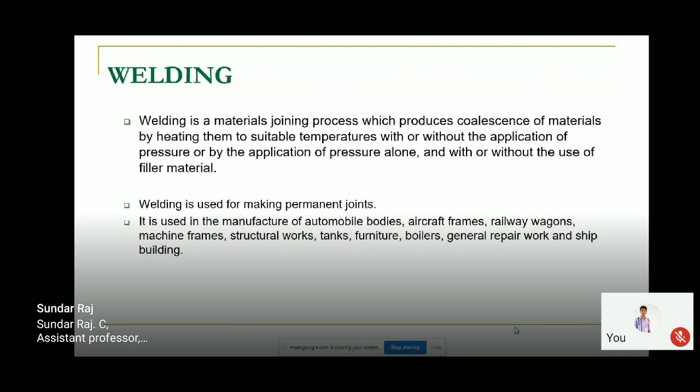Nowadays there is another welding process called friction stir welding and friction welding. This comes under the category of applying pressure alone, which is called the solid state welding process.

Here we are not going to melt the material. We are going to apply pressure alone, and we are going to bring the material temperature up to 60 to 80% of the base metal melting temperature. By the pressure, we are making the joints. That is called the solid state welding process.

At the beginning, Dr. Kanaran sir told that welding is one of the basic manufacturing processes - yes, it is absolutely correct. Application of welding is very wide, even from your household appliances to aerospace components. Without welding, you cannot see even any component.

If you see any vessels in your kitchen, definitely it will be joined by a welding process. If something is going to space - rocket motor casing, satellites, whatever goes into space applications - it is completely fabricated by the welding process. So without welding, nothing is there in manufacturing. Even a small component, in a fan, a table, whatever it may be, definitely welding will be there.

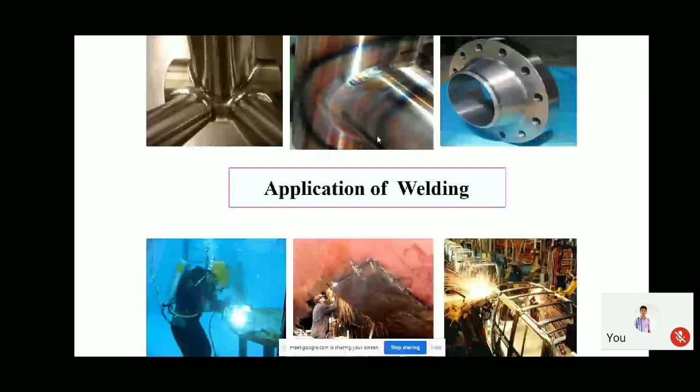Now, in the gas welding process, we can call it as - sir, please. Oh yes sir, sir okay. Okay, no problem, you continue.

In the gas welding process, the oxyacetylene welding technique, as we know well, is called gas welding or oxyacetylene welding. We are using oxygen as well as acetylene combined together, and we are getting the fumes. Through that, we are making the weld joints.

Electrical arc welding comes under SMAW, GTAW, plasma arc welding, GMAW, SAW. The main industry applications come under GMAW, GTAW, and plasma arc welding, widely used because here we use electric current as the power source to melt and join the material.

This is the high density welding process. Generally there are two types: one is laser beam and another is electron beam welding. The power source from this high density welding is very high as compared to the electrical arc welding process.

So basically what is happening, sir? The metal is in solid form. We are melting the metal to the liquid form, and then it starts to solidify, and we are getting the joints.

The other type is the solid interface. Here we are not going to melt the material, but we are making the joints without melting. As I told you previously, there are two different types of welding processes in this: one is friction stir welding technique, and the other is the friction welding technique.

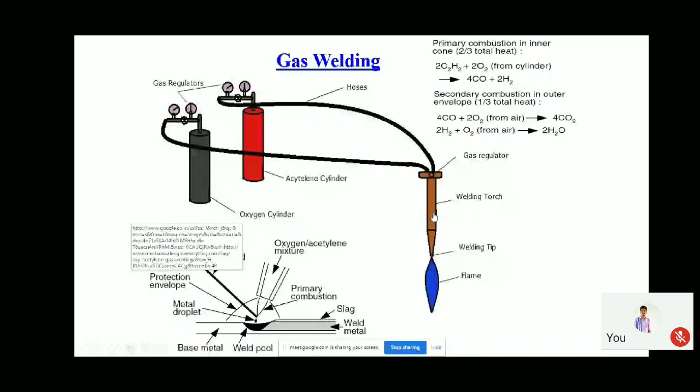When these two gases combine together in the torch, we are getting the fumes. Based on the percentage ratio of the fumes, it will be considered into three different categories: neutral flame, oxidizing flame, and reducing flame. Here you can see there is an inner cone and an outer cone, so the mixing ratio of the two gases gives you the different flames.

The next one is the most important and widely used welding technique globally. That is called the gas tungsten arc welding process, also called TIG welding. So basically, how does this function, sir?

Here is the schematic layout and this is the real-time photograph of the weld plate. The welder makes a groove of the joint. He has the filler material in one hand and the torch in the other. When the fuse comes out, when this tungsten electrode touches the base material, the arc starts to initiate by melting the filler material, and the weld joint takes place. I can show you a small video.

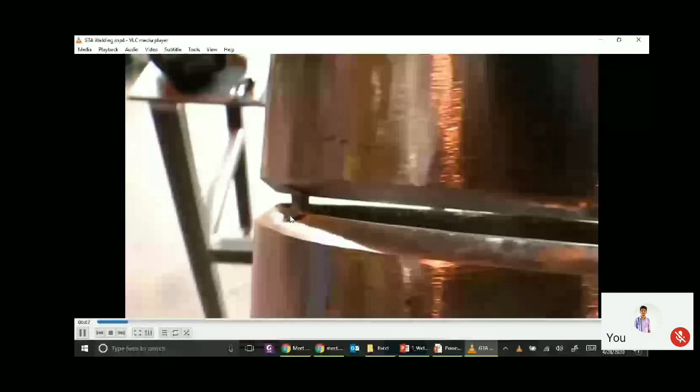So now you can see here, this is a pipe joint. The tack welding is already done, and the groove has been taken. This is the electrode, the tungsten electrode, and the filler wire is here. The arc comes when the tungsten electrode touches the base plate or material you want to melt. By feeding the filler wire externally, the deposition takes place. So this is the concept of the TIG welding process.

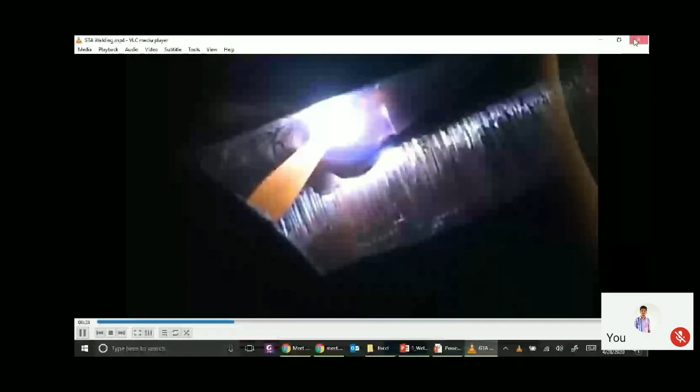So you can see the weld bead over here. With low deposition rate and slow speed welding, you get a clean weld. The deposition rate is very less in TIG welding because you have to coordinate both your hands, one hand on the torch and the other hand on the filler material. So coordination is very important. That's why the TIG process is always slower compared to the MIG welding process.

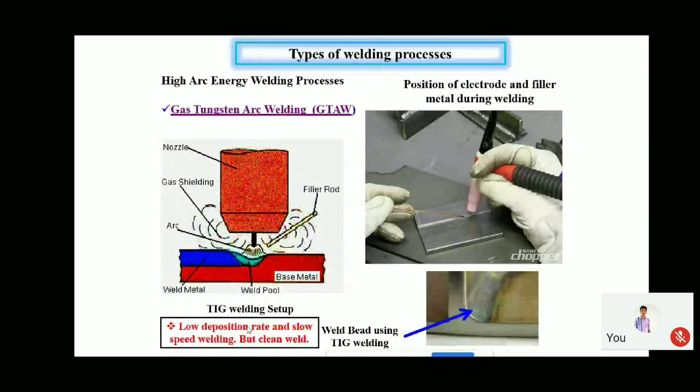So why are there different types of polarity? Why can't we just do it for a single one? I will tell you. In general, when welding any steel or nickel-based superalloy, we go for DCEN. When going for DCEN, the electrode is connected to the negative side and the workpiece is connected to the positive side. When the current is maximum at the workpiece, we get the maximum depth of penetration.

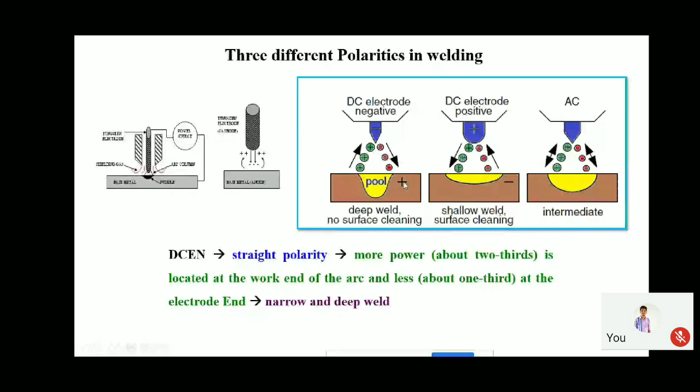Then why do we need this kind of polarity? When you are welding aluminum alloy or magnesium alloy, an oxide layer forms during the weld process, aluminum oxide (Al2O3), on the top layer of the weld. It's not possible to clean it during the welding itself. So when connected this way, more current is on the positive side and less on the negative side, and the atoms get bombarded so that the oxide layer is completely removed. So when welding aluminum alloy, we generally use DC electrode positive, or for magnesium alloy as well. This is the concept of what happens when welding aluminum alloy.

In the TIG welding process, there is another process called pulsed current gas tungsten arc welding. In general, what is this process? The machine should be the same, you use the same welding machine, but there is another option called the pulse parameter, where you vary the current from a lower level to a higher level. For example, in continuous current GTAW, the welding takes place continuously like this, with no change of current. If you fix the current at 180, the entire weld will be done at 180 amps.

Sir, your audio is breaking up. Kindly have the mic near. Audio is breaking up, sir.

Audio not clear, sir. Is it clear now? Yes, sir. Hello. Yes, sir. It is clear, sir.

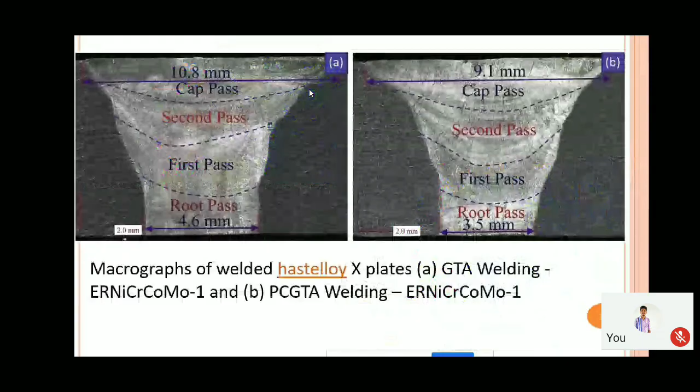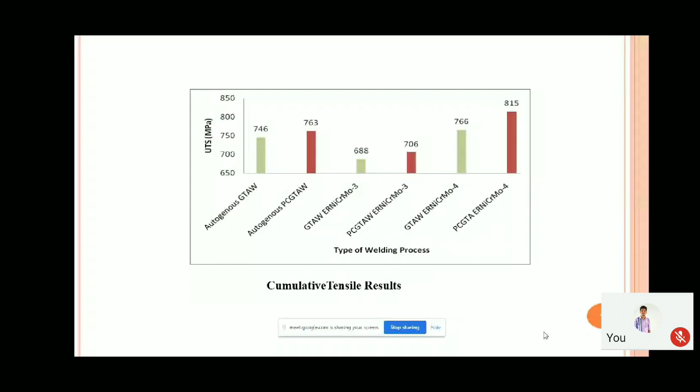So what are the advantages and disadvantages, sir? It is not suitable for joining thick sections. GTA welding is suitable for joining thin sections due to the limited heat input. The deposition rate is low, as I told previously, compared to MIG welding. So you can weld metal without filler material. Autogenous welding is possible, up to 3 mm thickness, not more than that in the autogenous case. Excessive welding current causes melting of the tungsten electrode and results in brittle tungsten in the weld pool.

So you can see this welding process can be used for welding reactive materials, even titanium and zirconium is possible, and multi-pass is possible with low welding speed. This is the disadvantage. And these are some of my own reference papers which I worked on closely with GTA and PCGTA with different grades of superalloys.

And another process is called the ATIG welding process. So what is the ATIG welding process, sir? It is again a conventional TIG welding process. So if you are applying any salt, for example Fe2O3, SiO2, TiO2, which is available in our chemistry lab or any laboratory.

So you can mix the salt with methanol, ethanol, or acetone. You just apply it over the weld area. And after you apply it, you do the welding process, your entire property gets changed. So what is happening, sir, actually? For example, when we are doing the conventional TIG welding process, your molten pool will flow away like this.

But when you are applying a salt, like SiO2 or TiO2, the flow of liquid will go toward this direction. So what is this effect called exactly? It's called the Marangoni effect. So what is happening is it converts the negative surface tension to positive surface tension of the weldment, so that the weld will achieve deeper penetration as compared to the conventional welding process. So in this case, even with lower current, you can achieve the maximum depth of penetration. That is possible with the ATIG welding process.

As I told you, in the autogenous case, we can do welding of only 3 mm thickness. But when you apply any salt like SiO2 or TiO2, you can go up to even 8 or 9 mm without adding filler material in the TIG welding process.

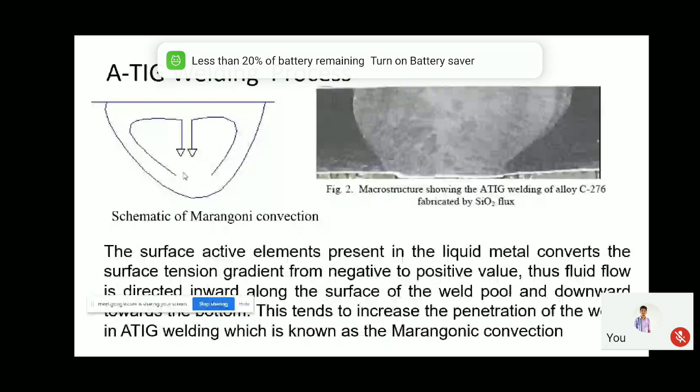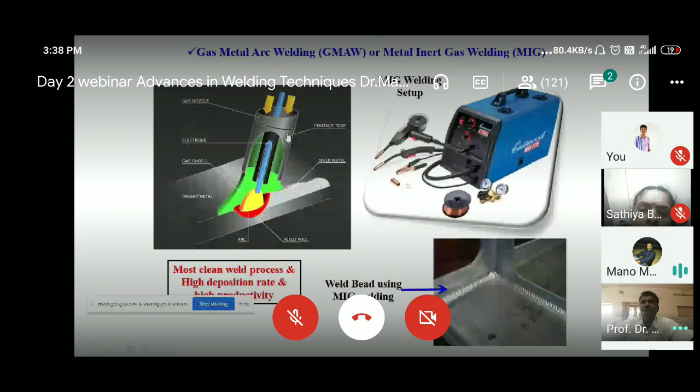You can see here the shielding gas, the electrode, and the filler material, everything is coming inside the nozzle itself. In this nozzle itself, you are getting filler directly. Whereas in the case of TIG welding, you are feeding the filler material externally and doing the welding, so the time taken will be more in the TIG welding process. Whereas in MIG welding, since the filler wire is directly coming inside the torch in the nozzle itself, the speed will be very high.

Sir, your PPT is not showing.

It is very difficult to weld high strength aluminum alloys, particularly 2 series as well as 7 series, in this welding process. These two aluminum alloys are widely used in the aerospace industry because of their high strength compared to other aluminum alloys. In order to weld this kind of material, the industry Fronius developed a welding machine called the CMT process, the cold metal transfer process.

The CMT process works similar to welding in a short circuit mode. When the electrode touches the metal, automatically the wire retracts back. Immediately switching off the current, the wire retracts back to the nozzle so that the weld pool detaches and comes off as fine droplets. When it forms very fine droplets, the heat input is comparatively less, so the possibility of forming a crack and other defects is reduced in the CMT welding process.

When reaching the base metal, the short circuit happens. When the short circuit happens, the wire retracts back. When it is retracted back, the molten metal falls down onto the base plate, so that the welding process takes place.

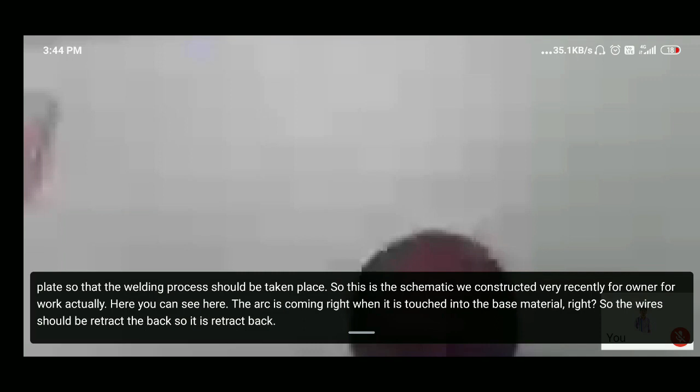This is a schematic layout we constructed very recently for one of our works. Here you can see the arc is coming, and when it touches the base material, the wire retracts back. As it goes up, the molten pool forms as the electrode melts, and it falls down. Similarly, the cycle keeps repeating. This is the working principle of the CMT process.

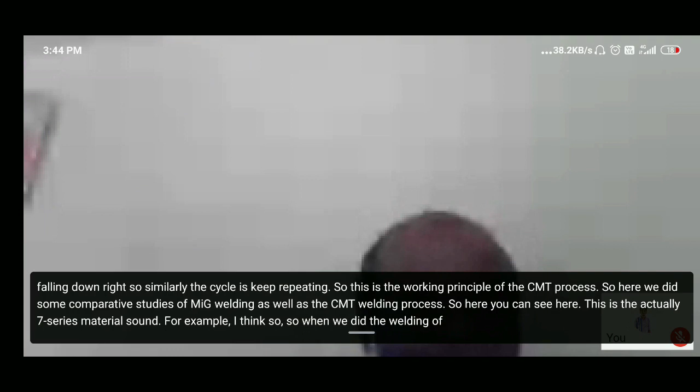Here we did some comparative studies of MIG welding versus the CMT welding process. This is a 7 series material, 7475 alloy I think, welded with two different filler materials, 4043 and 5356. When I did the welding with the 5 series filler material, I could not find any kind of defect, whereas in case of 4043, more porosities were present. So the selection of filler material is one of the most important factors in the welding process.

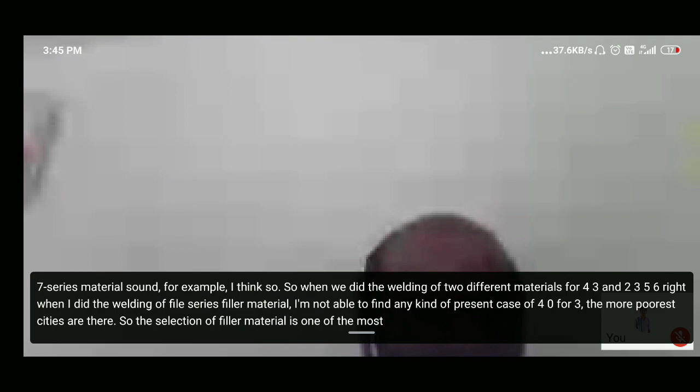Also, in the pulse mode, the bead width is very less, whereas in normal CMT, the width is very high. In GMAW, again, the width is very high. When I go for the pulse mode, because of the controlled current environment, I get a much lower bead width.

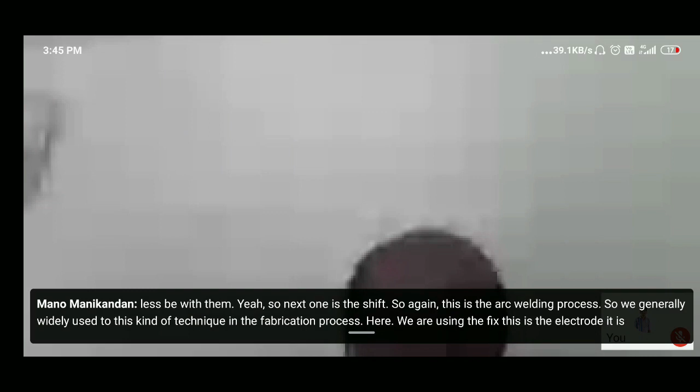The next one is the shielded metal arc welding process, which you know very well as the stick arc welding process. We generally widely use this kind of technique in fabrication. Here we use a flux-coated electrode. This coating gives protection during the welding process and also acts as a shielding agent.

The electrode will always be classified with some numbers. For example, E7018. E indicates the electrode. The first two digits, 70, indicate the ultimate tensile strength - here 70,000 psi. The 1 indicates the position of welding, and the next character indicates low hydrogen. So if you see any electrode, there will definitely be some number representing the strength, the position, and the hydrogen indication, all represented together.

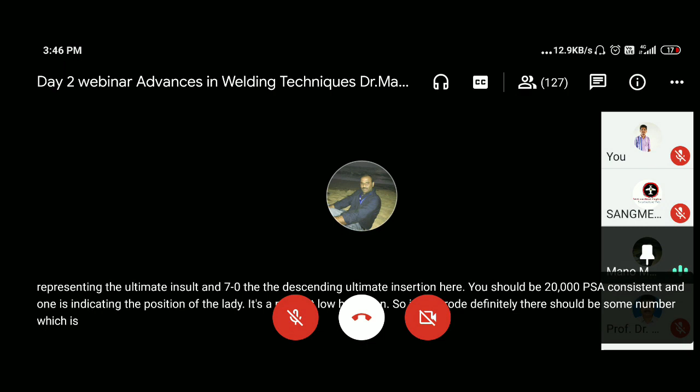Next is the submerged arc welding process. Why do we go for submerged arc welding? If you want to weld a very high thickness plate, we use the submerged arc welding process.

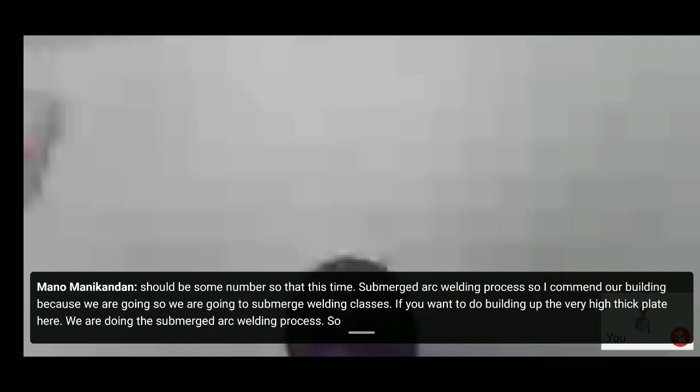You put granular flux - this white color showing here is the granular flux, and the torch is here. The torch should be submerged inside this flux, so during welding you cannot see the flame outside. Generally in industry, if you want to weld very high thickness plates, they go for the submerged arc welding process.

Next is laser beam welding as well as electron beam welding. As I told you previously, these two techniques are high density welding processes. The current coming through, the electrons coming out, bombard the material and melt it. Industry uses this process for complex kinds of things - they go for laser beam welding as well as electron beam welding process.

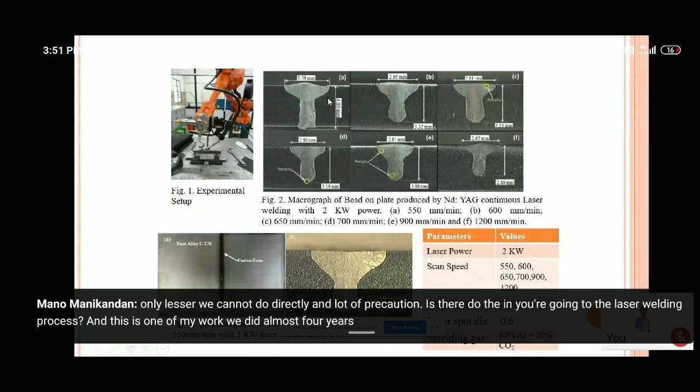This is one of my works from almost 4 years before. We tried welding a 3 or 4mm thick plate of Hastelloy C276. We did a lot of trials first to optimize the process parameters, and finally we achieved full penetration at a thickness of 4.8mm.

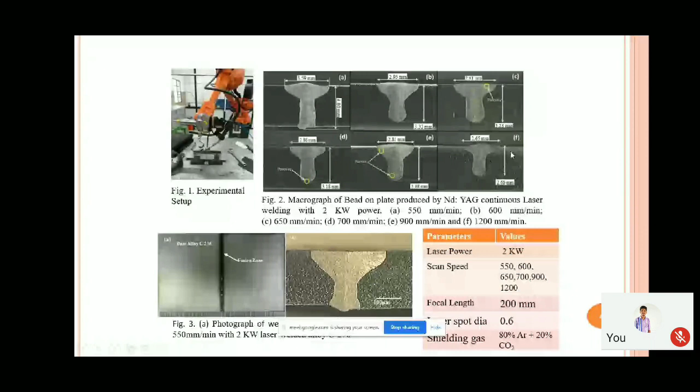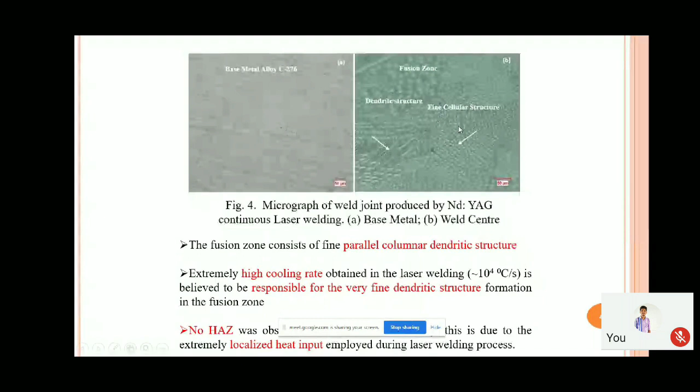We compared the study of laser welding with the TIG welding process on the same material. We observed that the microstructures are very fine, which leads to higher tensile properties as well as higher micro hardness compared to the TIG welding process. I got tensile properties almost the same as the base metal property. It's really very interesting, and I got a very good result compared to the TIG welding process.

You can find this publication - this is my reference, my published article on the laser welding process.

I got the tensile strength almost the same as the base metal. My base metal strength is 750, and in fact I got higher than that - an average of 761. So compared to the TIG welding process, laser welding gives an excellent result, achieving strength equal to the base metal.

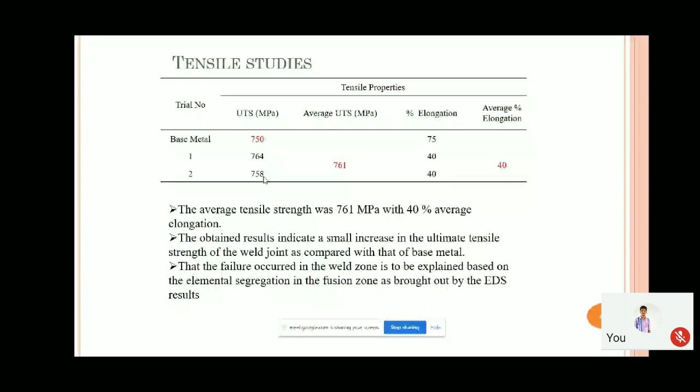Next is the laser hybrid welding process. Laser hybrid welding is a new development where we can do both arc welding and laser welding in parallel. You can combine a laser source with a TIG or MIG welding machine, and both will melt the material together, allowing you to achieve very fast welding with high depth of penetration in an easier way. This is called laser hybrid welding technique.

Next is the electron beam welding technique. As I told you previously, electron beam welding is widely used in aerospace industries for welding titanium alloys, because titanium cannot be welded with the TIG welding process - it requires a vacuum environment.

So in electron beam welding, the workpiece should be kept completely under a vacuum environment while we are doing the welding process. High depth of penetration is possible, owing to the keyhole welding technique. So you can join any dissimilar combination or similar combination using electron beam welding.

Whereas from the industry point of view, they widely use it for titanium alloys, because titanium is not possible to weld with the TIG welding process due to oxidation issues. You will get cracking, porosities, everything.

And this electron beam welding technique, the investment cost is very, very high. Even if you want to go for a 40 to 50 mm thick plate, you need to invest more than 8 crores for a single machine. And the maintenance cost is very high. So very rarely do people working in the aero industries have this electron beam welding facility.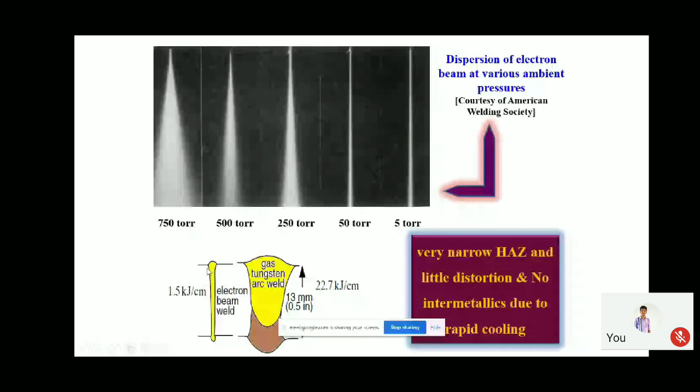Compared to even TIG as well as laser welding, the microstructures are completely refined. Very fine cellular and dendritic structures can be observed in electron beam welding. And the HAZ is completely nil, because the width of the penetration is very less, so you cannot see the HAZ also. This is one of the advantages compared to conventional TIG or MIG welding process. You can see here the microstructures are very fine.

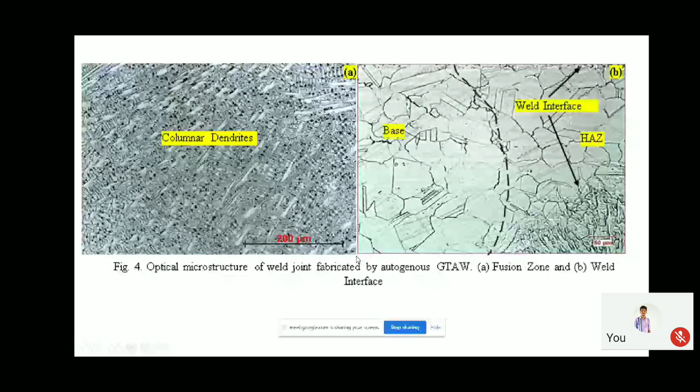Next, to the resistance welding. In general, resistance welding is widely used in automotive industries. For example, in the manufacturing of a car, a lot of resistance spot welding will be there to join two materials, using electric current. So in spot welding, they apply force on two sides, the material is placed, and the welding operation takes place. So automotive industry is the main user of the spot welding process.

Next, moving to friction stir welding, one of the emerging green welding techniques. This friction stir welding technique is widely developed for aluminum alloys. There are 8 different series of aluminum alloys, based on the addition of alloying elements. As I told you previously, 2 series and 7 series materials are not possible to weld with conventional welding processes because they are heat treatable materials. So the only possible way to weld these aluminum alloy 2 series and 7 series is the friction stir welding technique.

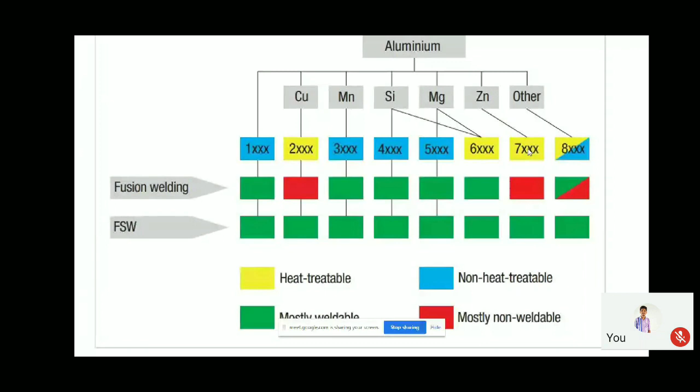So what is happening here, sir? It is similar to your milling operation. Actually, friction stir welding is similar to milling operation. I can show the video.

So here you have the two plates, and clamping is taking place. This is the tool, the welding tool. It keeps rotating, similar to a milling machine. It is coming... now it is applying pressure. By applying the pressure, the welding takes place.

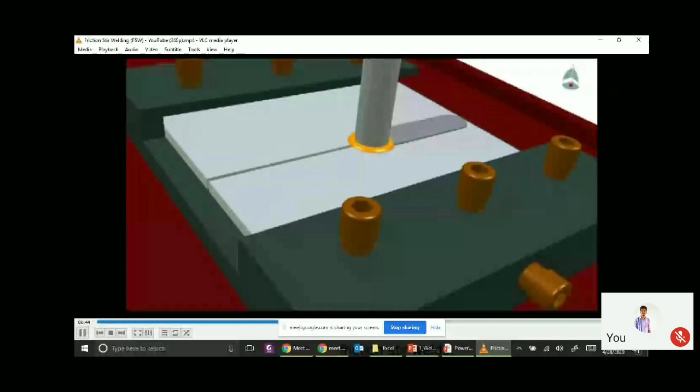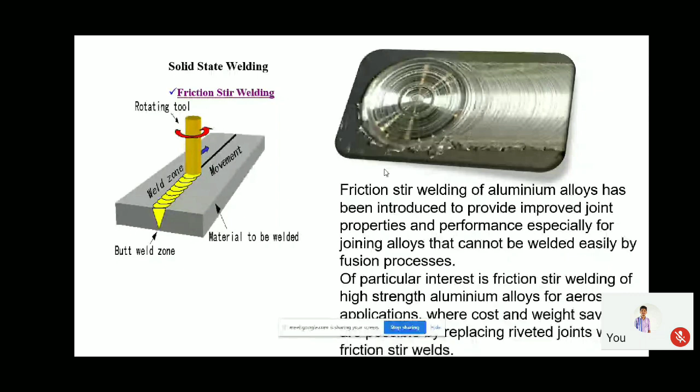As I mentioned in the very first slide, joining the plate without applying heat is called a solid state welding process. I think you saw the video now, and you will understand. Here, melting does not take place. The joining happens purely because of the pressure applied between the tool and the base material.

So we did some studies in the past on aluminum alloy 7475, and we have developed this tool.

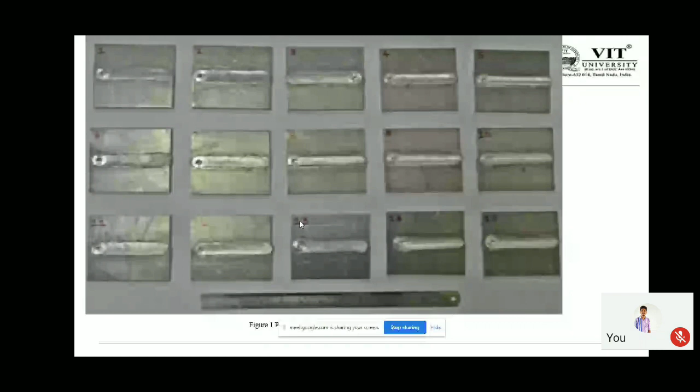Actually, we optimized the process parameters using the Box-Behnken method, and we can see the welding has happened over here.

So as I told you previously, for aerospace industries, particularly the high strength aluminum alloys are widely used for construction of the aircraft, both 2 series as well as 7 series. Mostly they are using the friction stir welding technique to join the materials.

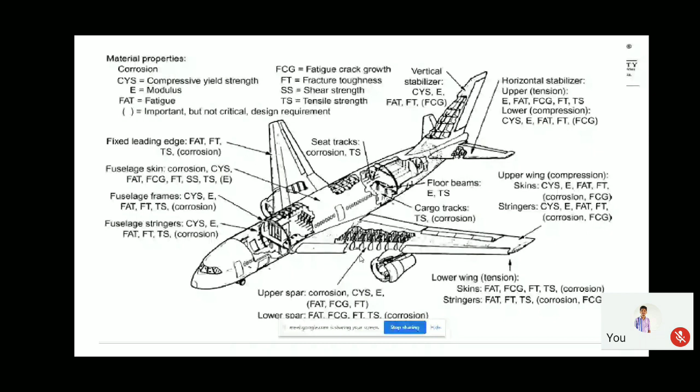And nowadays, even many new applications are coming out for metal to polymer joints. The composite is coming in a bigger way, because when you're using steel in aerospace or automobile applications, the weight keeps increasing. In order to avoid this, they are going for composite materials. Many parts of metal as well as composites need to be joined in aerospace as well as automobile industries.

So now we started working on metal to polymer welding also. There are different types of welding techniques available. One, we started trying friction stir welding to join both the metal and polymer combination.

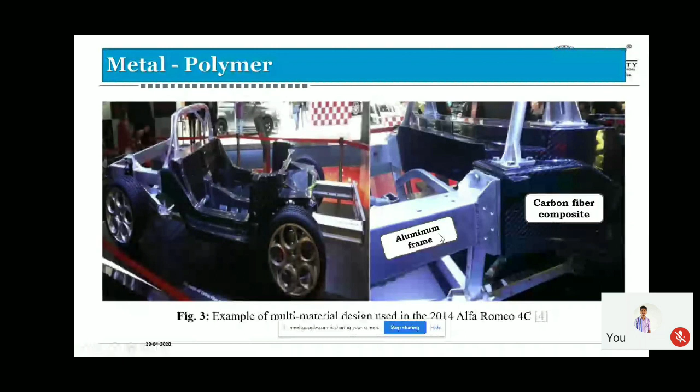So these are some of the applications you can see here: carbon fiber composite with the aluminum frame. Even for automobiles, they started using carbon fiber with aluminum alloys to make the welding. All these things are coming up in a bigger way.

So this is the construction of the aircraft. You can see here this is the upper deck and this is the lower deck. In many places now composites as well as metals are being joined, and they are doing it with riveting or bolting, but some technical issues are there because the stress concentration here is very high, so sometimes it starts making cracks.

So we are trying to do friction stir welding because most of the materials are 7 series material as well as composite materials. So we are trying to start working on metal to polymer joining using the friction stir welding process.

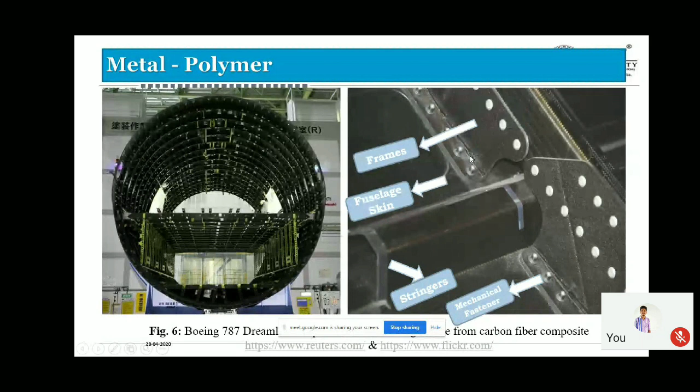If you see this slide closely, the passenger aircraft is shown here. As I told you, if you take aerospace, mostly the 2 series and 7 series materials are widely used everywhere in the upper wing, fuselage, lower wing, military and space aircraft applications, because this material has a strength of almost 650 MPa, which is equal to some grades of stainless steel.

That's why they are using aluminum alloy 2 series and 7 series in aerospace applications. So this is one of my publications related to the friction stir welding process. You can find it and look it up.

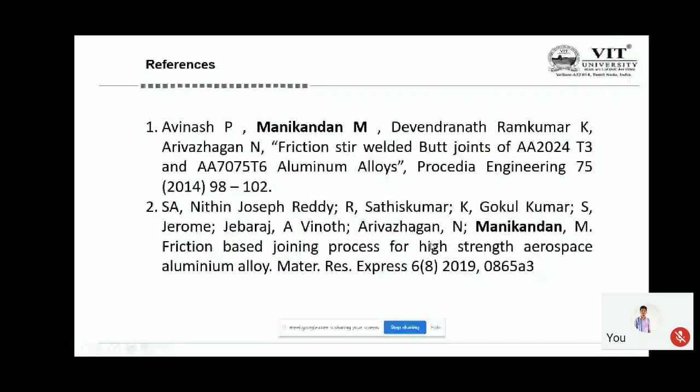So next, the solid state welding process is the friction welding process. I will show you the video. Using this, we can do the welding of pipe joints.

So now the joining is taking place over here.

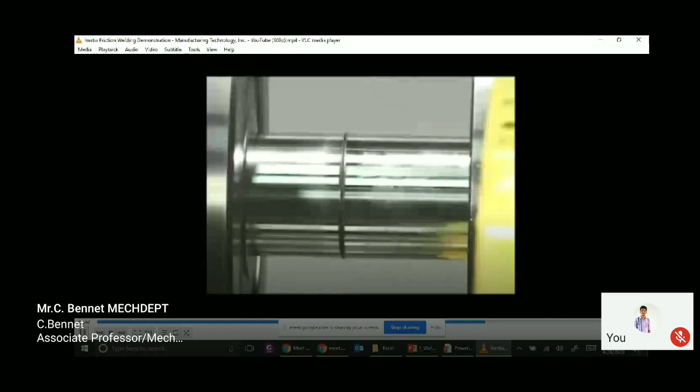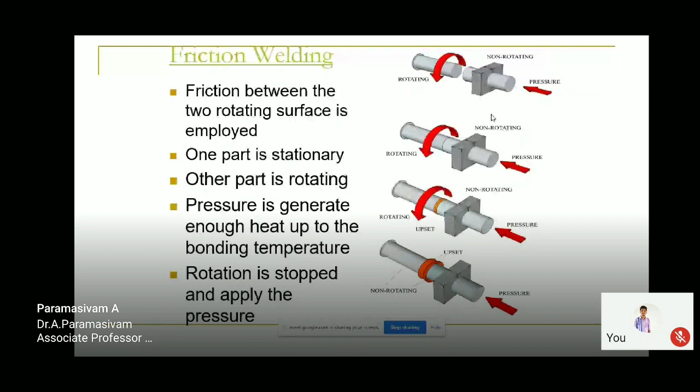So this is another solid state welding process. You are joining pipe kind of things. It is similar to our lathe machine operation. You can assume the lathe machine operation with the headstock and the tailstock. In the headstock, you keep one rotating object, and in the tailstock, you keep a stationary object. Once it reaches a certain speed, you apply pressure in the tailstock, and by applying the pressure, melting takes place and joining happens.

If you see the real-time component where friction welding is happening, you can see the turbocharger, the turbine blade as well as the shaft, both joined using the friction welding technique. Previously they did the electron beam welding technique, but since the cost is very high, nowadays they started doing the linear friction welding technique for joining turbine blades with the shaft.

So now we can see here, when you are increasing the welding current, the heat is increasing. When the heat is increasing, the melting rate is high. When the melting rate is high, the deposition rate is very high. When the deposition rate is high, the penetration keeps increasing. So this is the concept for the arc welding process.

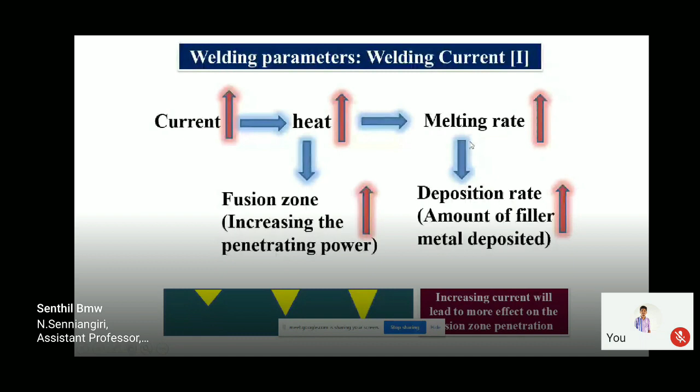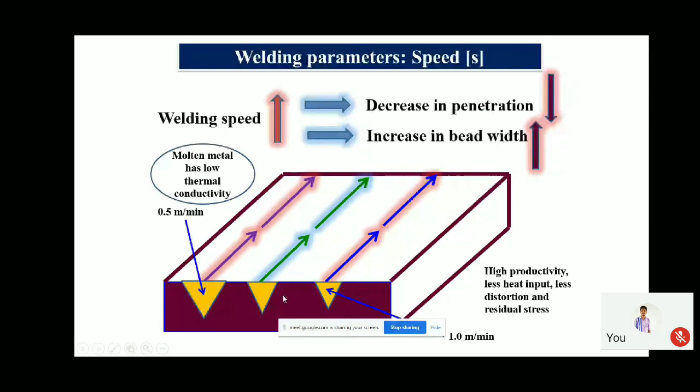Similarly, when the arc voltage is increasing, the arc length is also increasing, and the bead width is also increasing. And with reference to the welding speed, if you are going to weld at a very high speed rate, your depth of penetration keeps decreasing, and it will increase the width also.

So for the electrode, when you are choosing a higher current, your electrode molten pool will be of bigger diameter, as well as if you are choosing a lower current with a smaller electrode diameter, the diameter of the molten pool is also less.

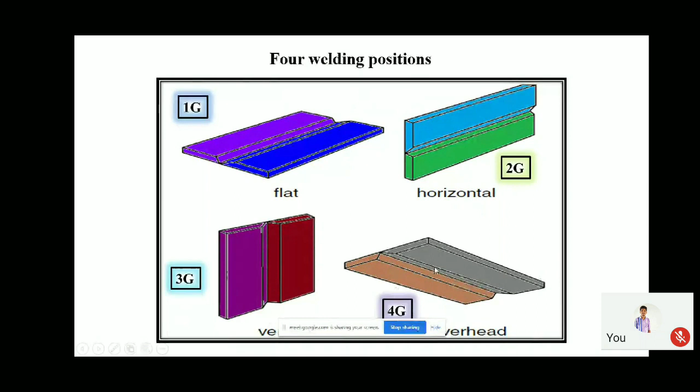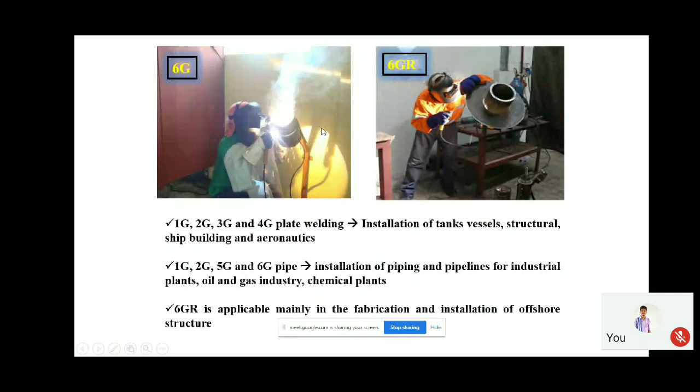So this is showing different welding positions. 1G means you can do it in the flat way. 2G is in this way, 3G is the vertical one, and 4G is the overhead one. And this is the 6G position, it is very difficult actually. Both 6G and 6GR are there. It is a rotating component, and the welder will do the welding on the rotating component.

So different types of joints, I think we know very well: butt joint, lap joint, tee joint, corner joint, as well as the edge joint.

So actually there are different types of welding defects also. We should always go ahead with proper welding, because if there is a small defect in the weldment, obviously failure will start from there. The external defects are lack of deposition, lack of penetration, over deposition, spatters, undercut, surface crack, arc strikes. These are all external defects. And the internal defects are cracks, porosity, slag inclusions - these are all internal defects.

So whenever we are going to do any kind of welding process, we immediately go for examination, for example the radiography examination. If you do the radiography examination, you can see any defects which are inside the weldment. And if you do the liquid penetrant test, you can see any defect in the surface region.

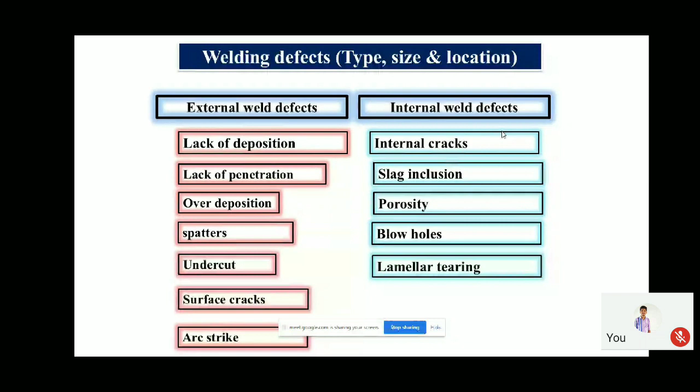Due to time constraint, I will skip the defects, because I have given everything already. One of the interesting topics is there at the end, I will move towards that.

Next one is the selection of filler material. Selection of filler material is one of the most important aspects in weldment design, because if you are not choosing the proper filler material, obviously the weldment will go for failure.

So usually there are two different types of filler material that can be selected for the welding process. One is the filler material composition which is equal to the base metal composition. For example, we know stainless steel 304 or 316 - when we are going to weld 304 or 316, we'll always go for the 304 or 316 filler material. But if you are putting your material in a very high temperature or corrosive environment, we can go for higher alloyed material, meaning composition which is higher than the base metal composition. In that case, we can use over-alloyed filler material.

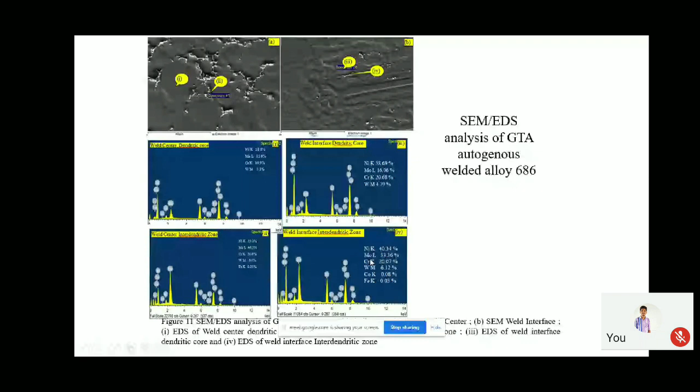So what is happening, sir? Actually, if you are not choosing the proper filler material, what will happen? You can see here the value of molybdenum - right here it is 16%, over here it is 33%. What is happening with these white color particles?

It is called segregation - the elements are segregated in one particular place, called the interdendritic zone. During real-time application environments, cracks will be initiated over the interdendritic region because of this segregation. If you see here, the segregation of molybdenum is 15 and here it is 40, here it is 16 and 33.

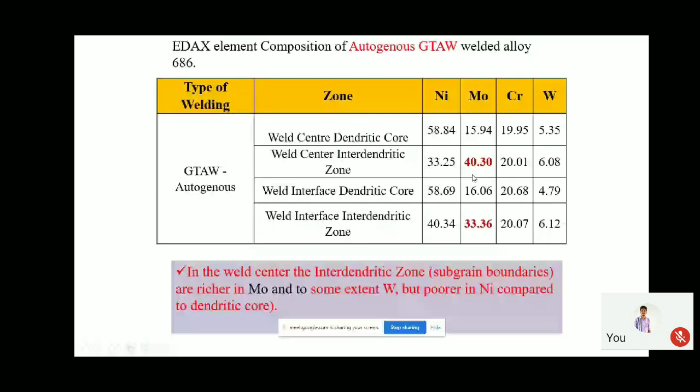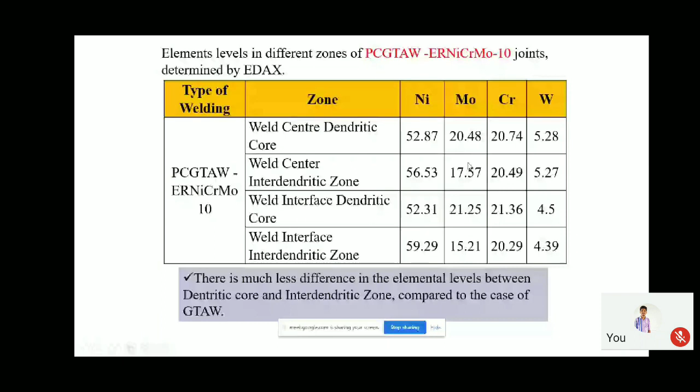Next one is also the corrosion. Corrosion is one of the most important things, because the microstructure at the place of weldment is different from the base metal. Obviously, the corrosion will start where there is a change in microstructure, not in a homogeneous way. So when there is more segregation, with reference to the previous slide, the corrosion value is very much higher.

So we did the corrosion test. Since this material is widely used in the marine environment, we did testing in synthetic salt water, simulating the sea environment, and potentiodynamic studies were carried out. We noticed that where the segregation is higher, the corrosion rate is high. Where the segregation is less, the corrosion rate is also less.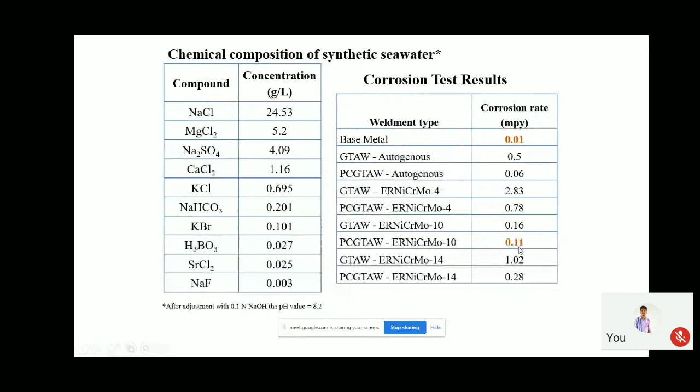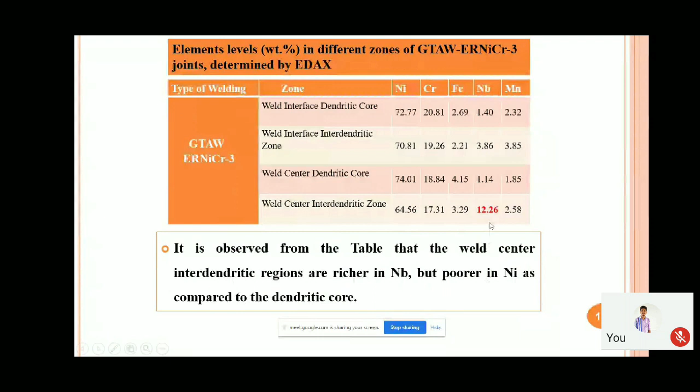So again, this is a similar slide representing the selection of filler material. It represents the segregation actually. Here I can see the niobium segregation is happening. So I'm able to see the segregation of niobium. In the same filler material, when I go for the PCGTA welding process, I could not find the niobium segregation.

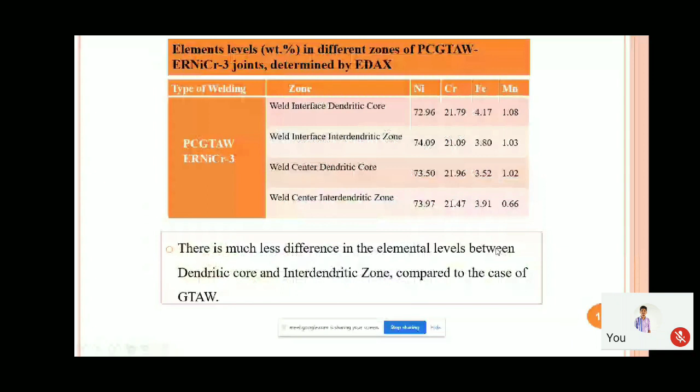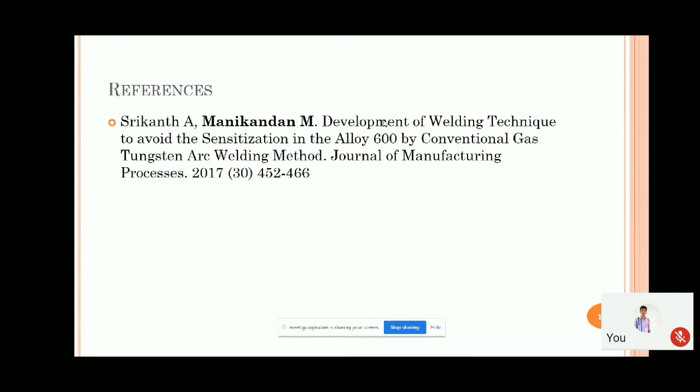So this is one of the allied techniques from the welding process: wire plus arc additive manufacturing. Nowadays everything is moving towards 3D printing. You know very well 3D printing is done with plastic, all those things. Nowadays even using the welding technique, we started working on producing the component. Wire arc additive manufacturing, it is called wire plus arc additive manufacturing. You can use any welding source, either TIG, MIG, or plasma, to develop the material.

So it's a similar setup to the welding process. One is the automation setup, we need the robotic arm. The power source is again simple GTA or MIG, or it may be plasma. You use the shielding gas to protect the environment, and you supply the filler wire by melting, and layer by layer you deposit, and you get the component.

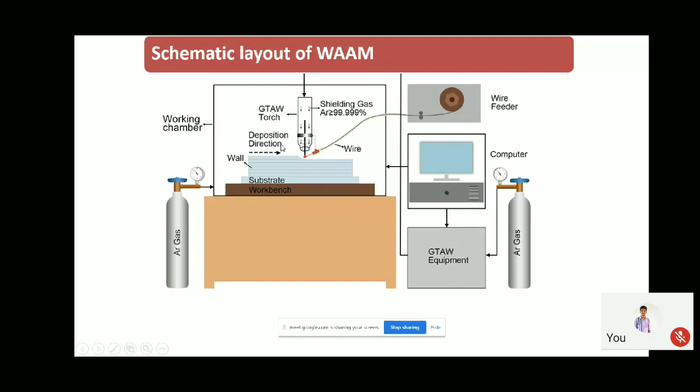In the global scenario of wire arc additive manufacturing, very few countries have started working in this area. If anybody wants to start working on a PhD or new research area, this is one of the new, upcoming areas of additive manufacturing called wire plus arc additive manufacturing. It's not a plastic one, it is metallic material additive manufacturing. Very few countries have started, and they hold patents, like US, Germany, UK, Japan, China, and South Korea is widely working on this particular process.

And what is the benefit over the powder based process? Even now they started using the laser sintering process, other things. What are the advantages over this, sir? It is suitable for manufacturing large scale metal products. WAAM print is significantly less expensive as compared to powder. We have to go for specific powder, but here we can use normal TIG or MIG welding filler material to develop the material. The cost of wire is very cheap as compared to the powder, so there's material savings and reduction of material cost.

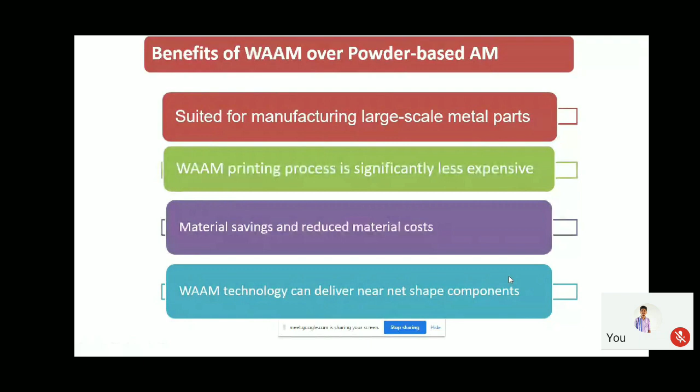WAAM technology can deliver the component closer to near net shape. We can make the component near net shape, and finally we go for a small cutting or machining operation, and we'll get the final machining.

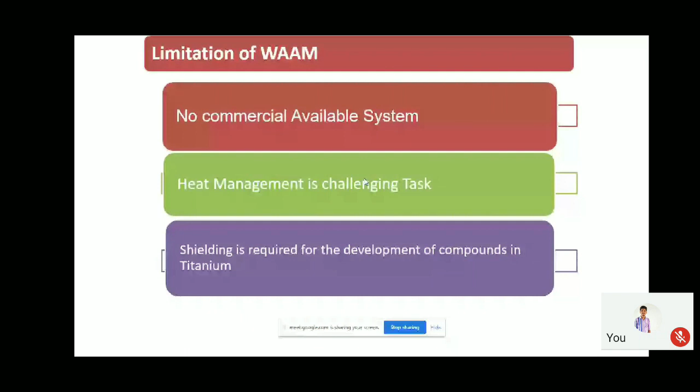And what is the advantage? Why are we going for the WAAM technique, sir? The WAAM technique system can reduce the fabrication time by 40 to 60%, and post machining time by 15 to 20%, depending upon the component size.

In the future, you won't find any casting product throughout the globe. I'm talking about after 5 to 10 years, because now everything is moving towards additive manufacturing technology, since you can make the component very fast as compared to other manufacturing processes like casting and machining. So in the future, casting industries may not be there.

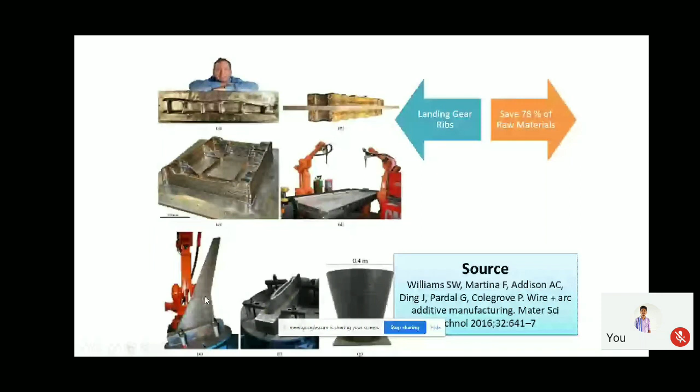Finally, what industries are looking for this technique, sir? Defense, aerospace, automotive, and many other industries are looking for this kind of process because it reduces the manufacturing cost as well as the time.

WAAM establishment in India is limited, very few DRDOs, IITs, NITs have played a role. There is a need to set up a lot of laboratory facilities. Even many engineering colleges don't have this facility. They can start working on this also.

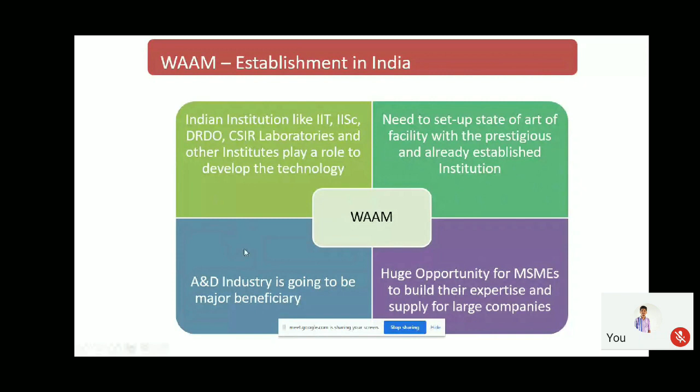There should be huge opportunities for jobs as well as small scale industries, because now the defense sector is placed in Tamil Nadu. There are many opportunities in the future. Aerospace and defense industries are going to be the major beneficiaries of this technique.

So I would like to conclude my lecture with this slide. Thank you. If you have any queries, please feel free to ask me. I will be ready to answer your questions to my level best.

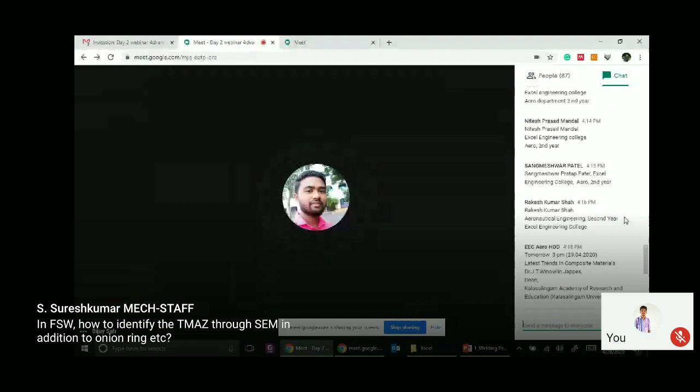There are two types of residual stresses: compressive and tensile. When you do welding, in the fusion weld zone, you definitely get tensile residual stress, which affects properties. We have to convert the tensile residual stress into compressive residual stress. When you have compressive residual stress, your fatigue and creep properties will get improved.

How do I change this tensile to compressive residual stress? There are many techniques, like surface engineering, laser shock peening, and other processes. If you do laser shock peening or shock peening, it will convert tensile residual stress to compressive residual stress, not entirely, but to some extent. This will help improve the fatigue life or creep life of your component.

Thank you, sir. Thank you, sir. Any other question? I hope we can end the session, sir. Thank you, Vijay.

Good evening, sir. Good evening. My name is Sadasivam from RMK College of Engineering, Chennai. I have only one question, sir.

In the beginning, you were talking about EBSD analysis for grain data. I am working in cold forming of aluminum alloys, so I am very much interested in measuring the texture of grains. Can I know where to do this?